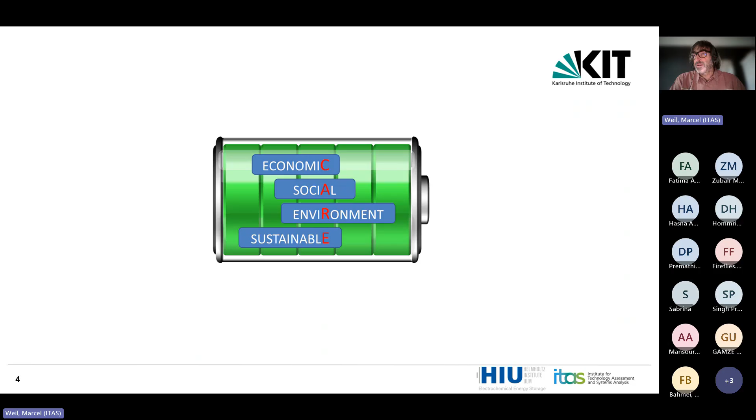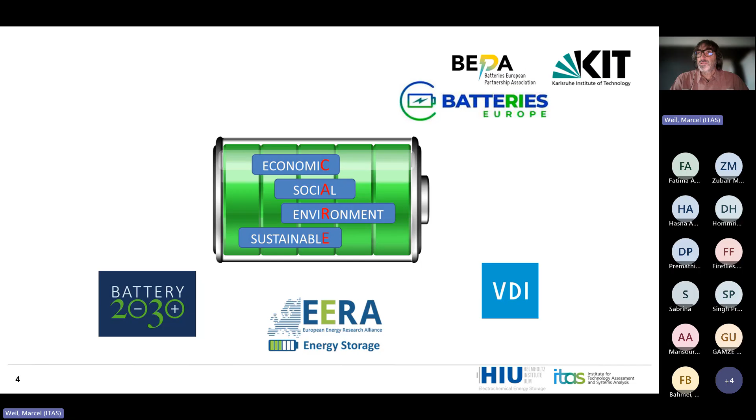We are quite active in international flagships or activities, for instance Battery 2030 Plus in Europe, then the different EERA, the European Energy Research Alliance - we are active in the energy storage system group, heading the subgroup of techno-economics and sustainability. Also for VDI in Germany, Batteries Europe with BEPA, where I'm personally heading the Task Force Sustainability. We're also involved in the carbon footprint regulation of the EU, and now, rather recently, we've been invited to support the strategic European energy technology plan, the SET plan, where we are responsible for the topic of energy storage.

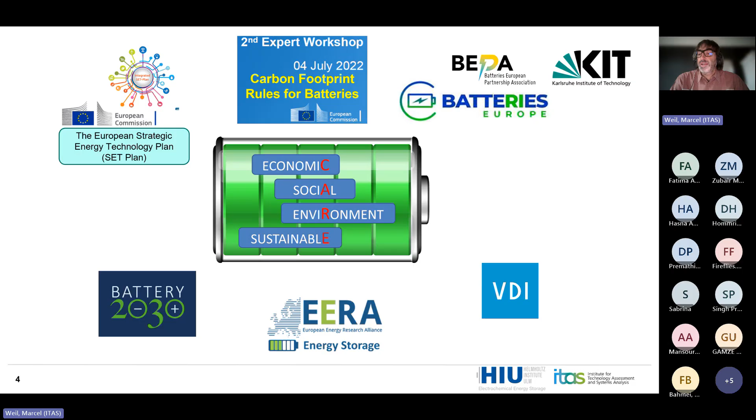Now coming closer to the topic - we are hopefully in the middle of the energy and mobility transition. If we want to solve our big global problems, and that's not only global warming, we have to stop the use of fossil fuels in all sectors. That's not only driving cars, it's also on the industry level, the commercial customer level, the household level, and of course mobility is a big fraction.

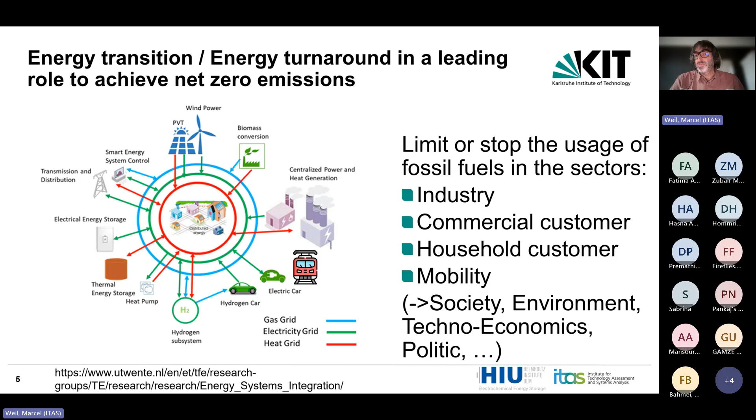Here, on one side, we have to deal with the whole society and really bring these developments forward, addressing not only technology development but also the complete society, looking for the interaction with society, to really solve the environmental problems and find a techno-economic pathway which is possible in the end. Hopefully this is all supported by politicians with a clear vision and clear understanding of what we have to do at present to solve the big challenging problems - at least on EU level.

There is now a certain awareness, and it's even such that they're saying, look, batteries are really a key item for all the developments in the future. Maybe that's also the reason that the battery sector is one of the first sectors to have a battery passport. You have special European regulation for batteries here. They are absolutely at the forefront. For other technologies, such things do not exist. So at least on the EU side, they're really aware that battery technology is an important topic and we have to focus on that. For that, we need some regulations and framing conditions, otherwise this development maybe doesn't go in the right and hopefully more sustainable direction.

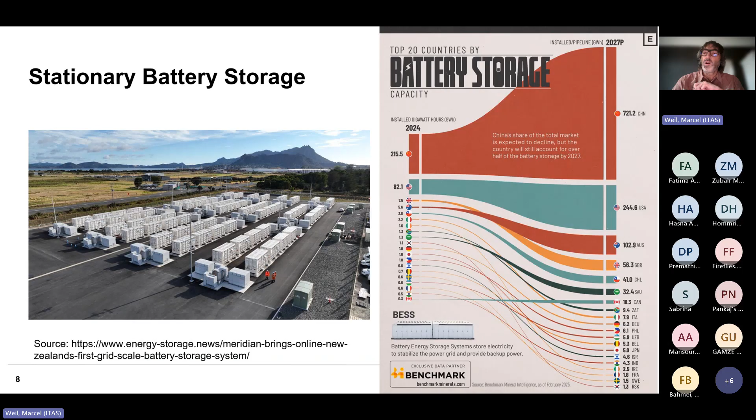We have a little bit of a different perspective. We say, of course, mobility will be a major driver for battery demand, but there will also be a tremendous demand for batteries in the field of stationary energy storage. That's not a development restricted to Europe. You see it clearly in this graph, also in the numbers for Asia, especially China, and the US. There is already big demand nowadays, and the perspective is there will be an even stronger increase in demand for stationary storage. That is actually what we believe, and there will hopefully be a publication from our side on that quite soon. So, mobility is important, but our message is: don't forget the stationary part, because that will also play an important role in the future.

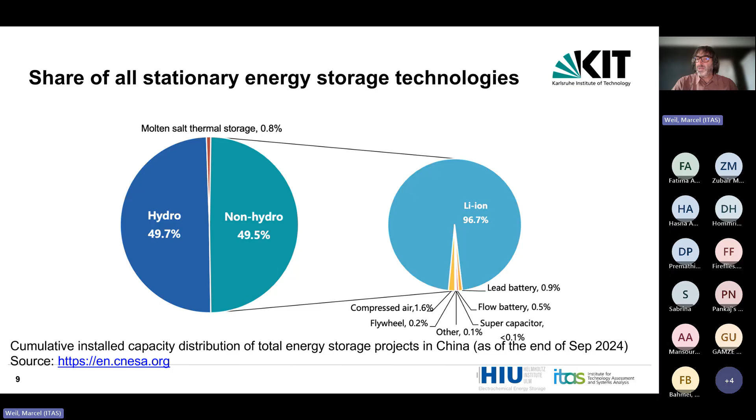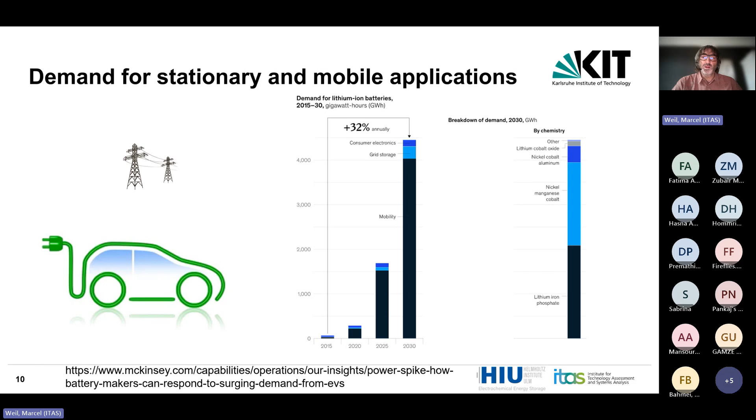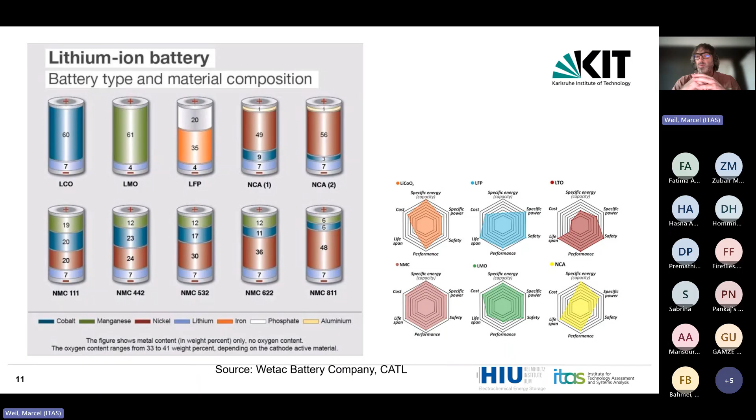And then if you also follow all the news in online media or newspapers, you always recognize there are a lot of announcements, and unfortunately quite often the announcements come from Asia, especially China, with all the dominant companies like CATL or BYD and all the others. They always push the market forward, saying, look, here we have the highest energy density, the highest lifetime, now super fast charging, and so on. This big news is nearly always coming from Asia, not from Europe and not from the

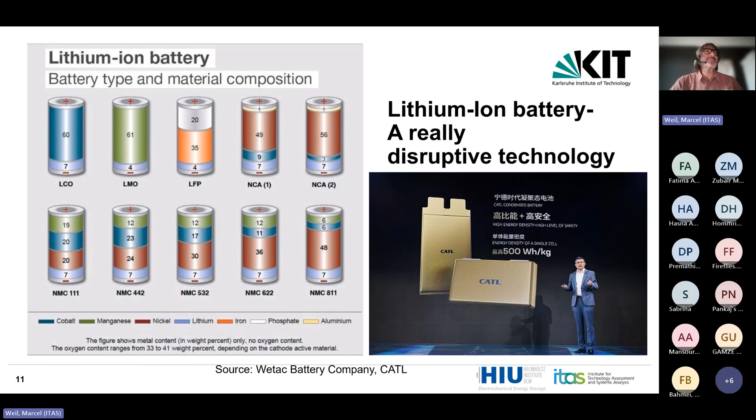States. Nevertheless, we are convinced that the lithium-ion battery technology is really a disruptive technology. That's why it's so important, and why there was even a Nobel Prize for the lithium-ion battery in the past, because otherwise your smartphone would look like that, or your electric car would look like that, but potentially with a trailer in the back with a lead acid battery, or your laptop maybe with a bigger screen, but with the battery on the side.

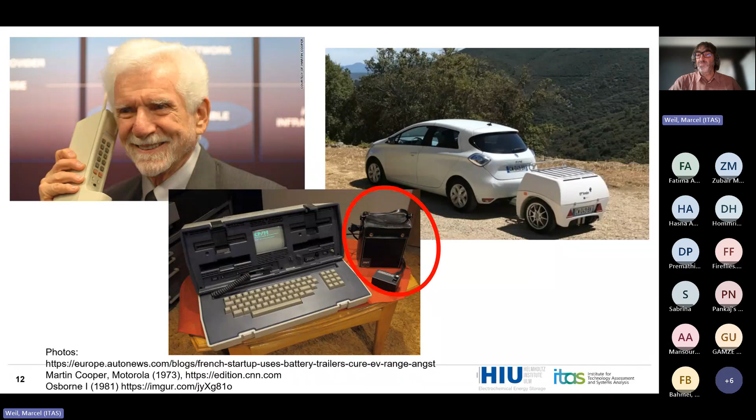Therefore, the lithium-ion battery was a game changer for all the developments we see today; that's really a disruptive technology. A lot of people always promise there is maybe a disruptive technology. Well, lithium-ion is really a disruptive technology and pushes all the developments in different sectors forward. And if you look around at what you are using, your smartphones, your sensors in your house, there are a lot of lithium-ion batteries already in place, rechargeable, sometimes also not rechargeable, but nevertheless lithium-ion batteries with high performance. So it looks like there is a bright future of batteries globally and also in Europe.

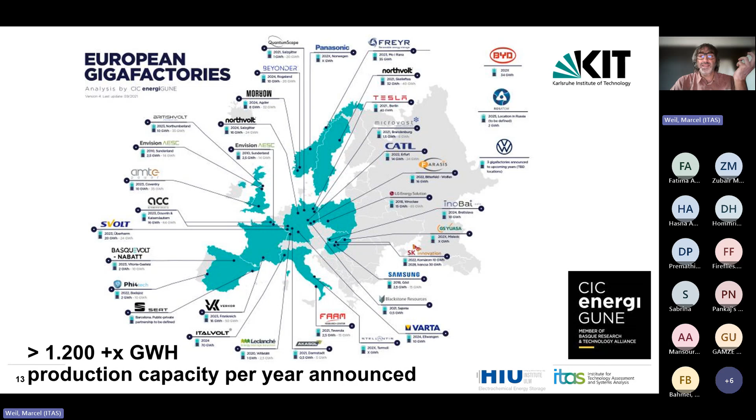And then there come people like us. I'm sorry about that. And we are saying, potentially lithium-ion batteries are not so sustainable, or at least we have a question mark regarding sustainability. And why? Well, as you know, they rely on so-called critical raw materials, regarding the EU definition, critical and vulnerable. That means depending to a high percentage on imports in Europe. That is also true for the States to a certain extent, but especially for the EU we quite often depend to a high percentage on imports, especially from not politically stable countries or countries with strong influence from Asia.

And the metals which are considered, as you know, are cobalt, lithium, nickel, copper. Copper's role is sometimes underestimated, but also phosphorus as a critical raw material, and natural graphite and also synthetic graphite now belong to the so-called critical raw materials. So we have to change something here, because otherwise the countries which export such critical raw materials can steer or even stop any development in other countries just by blocking the export of such materials. That is a big danger, and the EU and all the other countries try to solve this issue by looking for more regionally available resources or to replace resources.

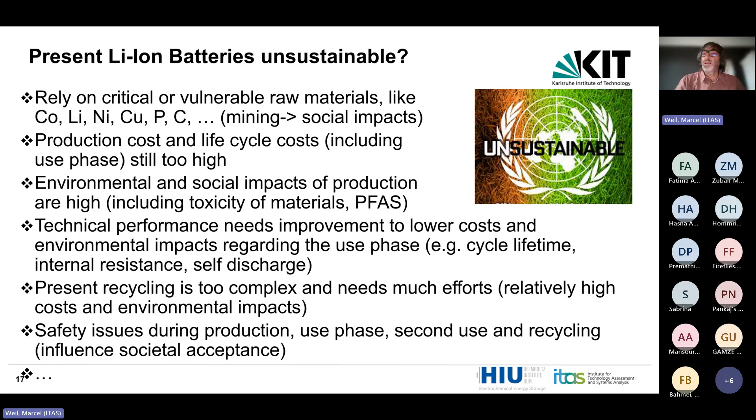And then last but not least, there are also safety issues. Maybe in the news you sometimes find information that some batteries are burning in bicycles, laptops, electric vehicles, cars, and so on. The safety issues are not only during the use phase, but are also quite important in the second use and recycling, because a recycler has to deal with the batteries, and if they start with a so-called thermal runaway, then sometimes in such recycling companies there's a big fire caused by the lithium-ion batteries. So not so sustainable, and that is actually the reason, in the end, that we are focusing on post-lithium batteries.

And then you look at the full periodic table to see which systems are promising, and that's of course sodium. That is at the moment a really interesting system, which is really close to industrial production or is even already in industrial production. Then potassium, magnesium, calcium, aluminium, zinc, chloride, and even more. That is under investigation at KIT, within POLiS, within Helmholtz Institute Ulm, but of course globally. There are big players and even industry companies with big research groups. So that's a big development towards these so-called post-lithium batteries, which have at least one major advantage: we use abundant materials in contrast to so-called critical raw materials like lithium, cobalt, nickel, copper, and so on.

Here, it was my try, I would say. So please don't take this graph so seriously. But the question is always to have an idea about the so-called technology readiness level of the different systems. And sometimes it's really difficult to estimate, because there's always a big discrepancy with what you hear in the news, where you always have the feeling everything is solved. But if we talk with technology developers, they only talk about problems. So we always have these two elements, and that's a bit crazy. On one side, the news says we now have a new system running very well with high performance and everything is solved. And on the other, the real people working at the base say, okay, maybe they have a running system, but maybe they still have the problem of this and that.

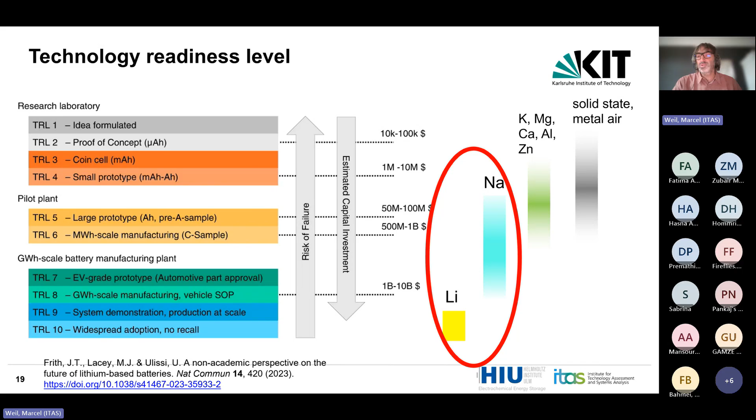You never know. If you maybe solve one big hurdle, especially for metal air batteries, all the problems with some side effects, then of course you have maybe very fast industrial applications. So that was just my try to have a certain estimation of the different TRL levels. But we will focus in this presentation mainly on lithium and sodium batteries, and magnesium actually too.

Okay, now we're coming to the topic sustainability. And if we think about sustainability, then we're not only looking at the production, we're really looking at the different raw materials, the design phase, quite important, the production itself, of course, the use phase, because there will also in the future not be the one battery which solves everything. Maybe there will be a dominant one, but there will still be other batteries which really fit a nice niche application. So also the use phase, and we have to assess the different battery types always in respect to their very specific application case.

Then the potential second use, third use of the batteries is a huge topic. If it's really possible, we will see in the future. And then, last but not least, recycling, or hopefully recycling. But as I said, recycling is not solved so far. And then, again, sustainability, with what different perspectives or methodologies I can address the topic, which on one side traditionally has just the three dimensions of economy, ecology, and social or societal aspects.

And if we address that, at least in the upper part from a rather quantitative assessment, then we have the traditional MFA, the material flow analysis, or also dynamic material flow analysis, especially important if you try to understand if there are some critical raw materials, or what could be the full loop of such materials in the global material flow system. Then the full family of life cycle sustainability assessment with the different LCA methodologies: the environmental life cycle assessment, the life cycle costing, and the social life cycle assessment.

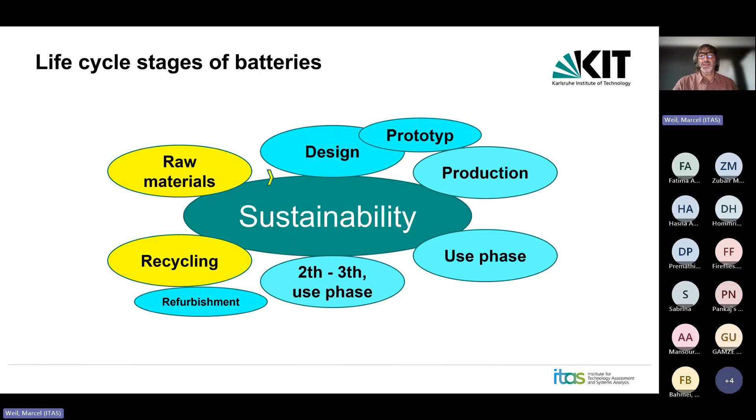Okay, let's start, now focusing on sustainability, raw materials, and the topic of recycling. And here that's actually quite an old graph, from when we started with this topic 15, 20 years ago. And always the question was, okay, there are a bunch of different metals which I have to use for the production of batteries for different applications, for different scenarios. And then the question is always, do we have enough resources, local or global, or do we maybe have some conflicts, or should we support the establishment of more mines and so on.

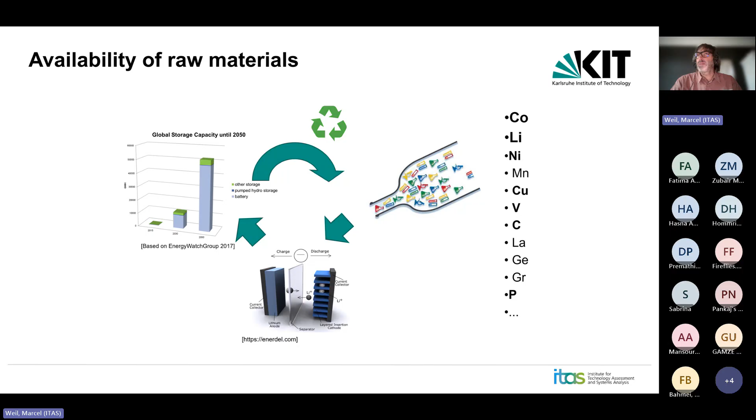And then of course also how we get all these materials back through the recycling loop to usage, hopefully in closed loop recycling to bring them back to the battery sector, or sometimes of course also in open loop, so that some materials can be used in other sectors, for instance for glass production or whatever.

We did a lot of different investigations in the past, but let's focus on one here. It's rather old, from 2018, and we focused on the mobility sector, especially the effects of electric vehicles. We have a lot of changes at present time, but we'll focus on that period.

Here's a graph, even from 2012, just so you understand what is behind the MFA model, the material flow analysis model. It's already 13, 14 years old.

The idea behind it is clear: we look on one side, the left side, at where the resources are, the different resources. We have salt deposits, the brines, especially in South America. Then we have spodumene, for instance in Norway, Asia, or Australia. Then we have lepidolite or petalite, or even some glimmer with lithium, but they weren't so important in the past, and also not nowadays.

Then, of course, there's the production and the usage. In the past there was big production for the usage of lithium in glass and ceramics, and batteries was just coming up. This changed dramatically. Now batteries is the biggest sector by far, dominating by 80%, and all the others like lubricants or alloys are no longer so important as the application of lithium.

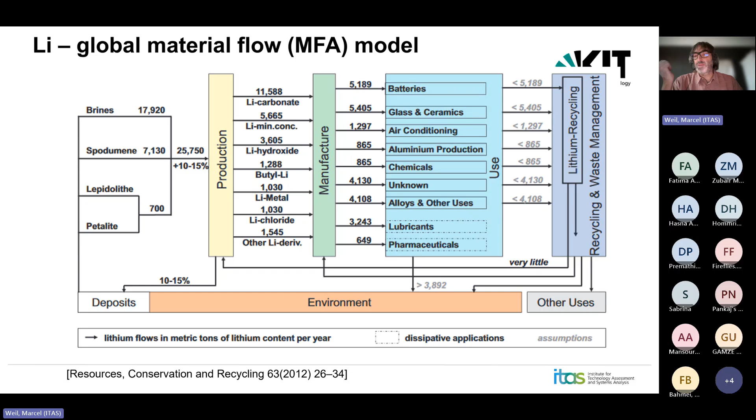And then also, what happens after the usage of the metals or materials, and what end of life looks like. Maybe it's recycling. Do we have dissipative losses, where they just end up in the environment with no way to bring them back? Or is there maybe even the potential for really a closed loop recycling, or at least an open loop recycling?

Based on such basic understanding of an MFA, we developed a dynamic MFA model, shown here on the right side. We focus not only on lithium, but also all the other materials: cobalt, nickel, manganese, aluminum, copper, iron, phosphate, and even graphite. Then you see the different parameters which change over time, like the global population, how many cars we have per capita, the vehicle lifetime, the battery lifetime, the market share of different vehicle types, and the different metal content in the different battery types.

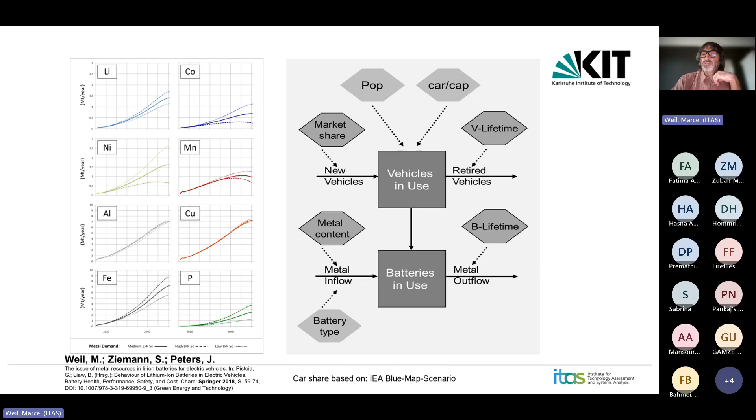That was the beginning, a quite dynamic model, but also a rather simple one. At this time it was really difficult to estimate how the parameters change over time with the population, but especially with the batteries—how big are the batteries in the electric vehicle? Here we have full electric vehicles, plug-in hybrids, and fuel cell electric vehicles, so we even included fuel cell electric vehicles. We estimated the battery size, and nowadays you would laugh about that, because even a middle class car already has much bigger batteries. That was a rather conservative assumption at the time, but the development turned out totally different.

We'll see it later. Here's how it develops over time, with vehicle life and battery lifetime and so on. Regarding these scenarios, we called it low LFP, meaning a low lithium iron phosphate battery ratio—that means all the other battery technologies dominate. Then medium and high LFP mean it's dominated 75% by LFP, and the others cope with the rest.

This is maybe the funny part: at this time I even received calls from colleagues doing real battery research. They called me and said, okay, now we know you may be an expert for sustainability, but for batteries you have no idea, because LFP will never enter the car sector. That was 2018, and those were the battery experts. Now it's totally changed—now the market leaders like BYD, CATL, Tesla all use LFP. They had, of course, some developments, not only on cell level but also on pack level. Nonetheless, you see how fast this changed within a short time of 7 years.

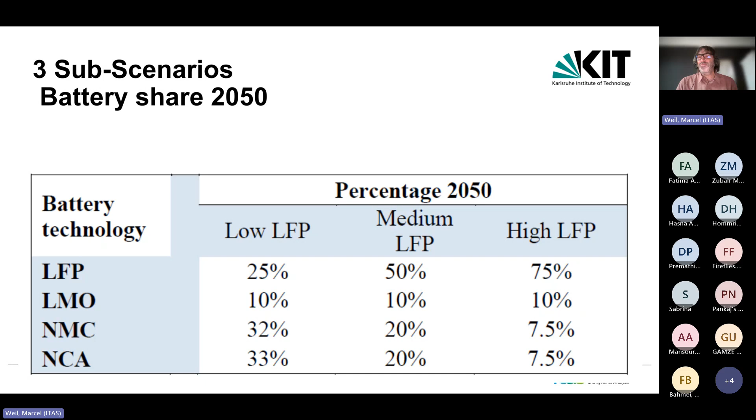Even such scenarios, which were just a scenario then, experts at this time said, oh no, that will never happen. And nowadays it's the state of the art. Just a fun fact on the side.

So coming to cobalt, as you know from all the news, we have the big problem that cobalt is especially situated in Congo. Congo is a very politically unstable country, highly influenced by all nations which try to have access to the resources of Congo.

Then, of course, there are also some other players, Zambia, which they try to push forward at the moment, but also Australia as a big country with a lot of outback where you can start mines everywhere, and they have a lot of resources.

But nevertheless, it's critical because Congo is in the center, and therefore we highly depend on Congo and maybe the countries which influence Congo. Therefore, cobalt is quite critical.

So let's see how this affects the scenario. On the right side here, you see the reserves and the resources. The reserve part of the resources is the part which you can mine in an economic manner nowadays. But this also changes over time.

Sometimes even the value for resources changes over time, because if you look for new mines, maybe you are very successful and find new deposits. So reserves and resources are estimations about present knowledge of how much is available globally, but in the future this may change, sometimes even negatively because you overstressed it already, though quite often it's rather positive, finding new deposits and increasing the values.

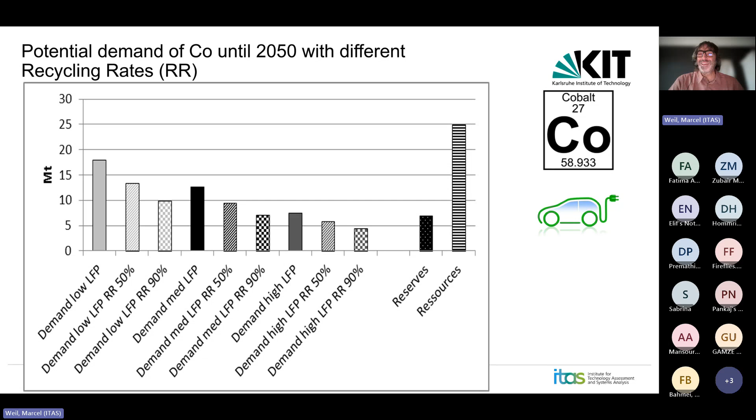Even in Germany now, they try to mine some lithium, on one side from minerals close to Freiberg. But even here in my region, the Rhine Valley, they already use geothermal plants to get the lithium out of the deep groundwater, I would say. And that is supported by the EU.

So we of course also potentially have some own lithium sources. One activity is really in Europe - in Portugal, and also some East European countries. There are some ongoing activities.

But of course the big players at the moment are Australia, interestingly, but also South America, one of the biggest producers, and China, of course.

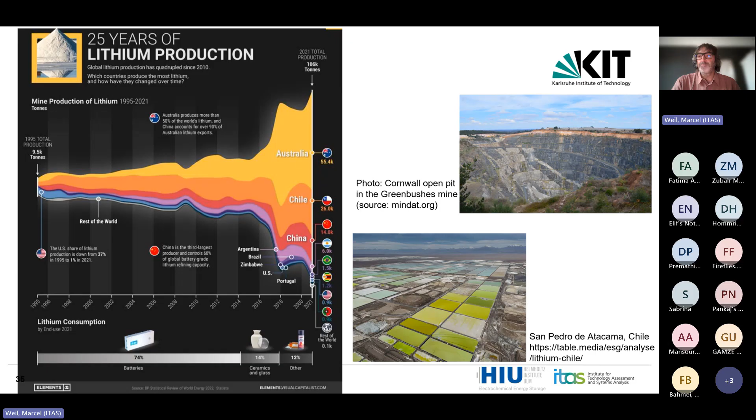If you go not from the environmental perspective or social perspective, then of course there are tremendous impacts. You also have to deal with that and find maybe a solution for that. So there are always different things and goal conflicts which you have to combine in such a way that it's at least not super critical.

With all the calculations, which are shown only for cobalt and lithium, not for the other metals, just due to time restrictions, we could say all the sensitive parameters could change in the future. Maybe the battery lifetime increases, and therefore in all the different cases resource demand would decrease. And if the share of SUVs would also decrease, then you use less battery for smaller cars, and you would decrease the resource demand in the scenarios.

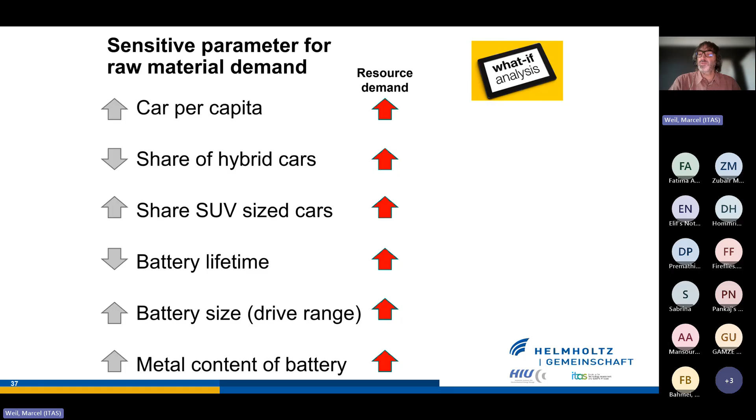But we also have to say the opposite is true. If we increase the usage of SUV-sized cars, then there would be an even more tremendous resource demand in the future, even more increase than we estimated. And the problem is, in fact, that we should all use such small cars. The bottom line in the green circle, we should use such cars. What happens is that we use middle class, which would maybe still be okay, but then we use trucks, SUVs, and even beyond that, sports cars and so on. And they have a high demand on one side for big batteries and sometimes even for high performance batteries.

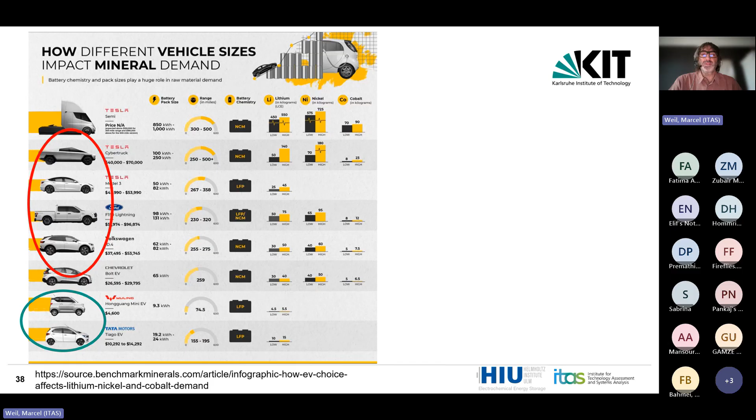And if you look especially at high performance batteries, then you have to go for nickel cobalt systems for high performance, and LFP is rather suitable for others. So crazy enough, and you see here in the numbers a strong increase already in the past, but the most recent numbers, 2024, show we already have 54% of new cars being SUVs.

And that is, of course, a totally unsustainable pathway, which is customer driven, society driven. So crazy. If we talk about needing more sustainable batteries, it's nice, but in the end the customers, the market, decide that we go on a totally unsustainable pathway. For this we need a solution and maybe a different trend, because that is not the right way we're going at the moment.

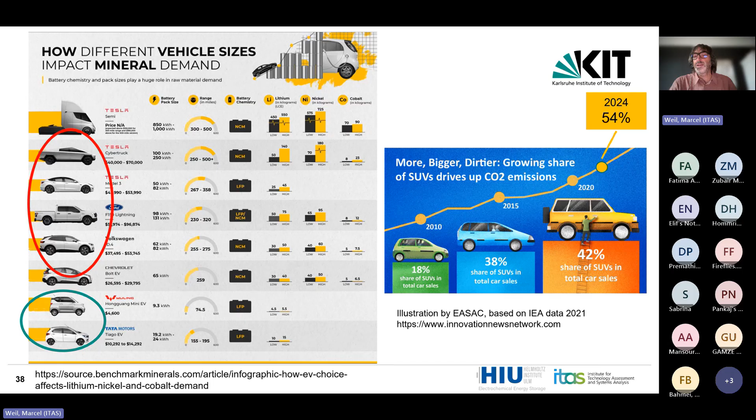Now, coming closer to the real battery topic, for us it's quite important that we influence the design of a new battery, because the design in the end determines everything. It determines how easy the production is going, or how well they perform in the use phase. It determines if they are capable of going into a second or third use phase. And in the end it also determines recycling. The EU is already talking about design for recycling, because if you develop a new technology today, you can't wait 10 or 15 years until there's a big waste problem.

People say maybe the battery or any technology is difficult to recycle, and then we have to deal with that. So not this end-of-pipe thinking, but really influence the technology already nowadays, so that there are easy ways to improve recyclability, which in the end pays off in 15 years when the battery is ready for recycling after the use phase. So design is quite important for us.

Therefore, we have strong cooperations with companies, with the technical developers, to influence hopefully the design in the right way, and also then to deal with prototypes.

And we did it, in a long tradition. We published the first LCAs of sodium-ion batteries. Then we have the first cost assessment of sodium batteries, which is very highly cited, one of the most cited publications in my case. Then we also had the first LCA on saltwater batteries—we will focus on that later. The first LCA of magnesium batteries, and even a prospective LCA for sodium batteries. And now with colleagues in Japan, it's already published, the first LCA of potassium—in this case, not calcium, potassium battery.

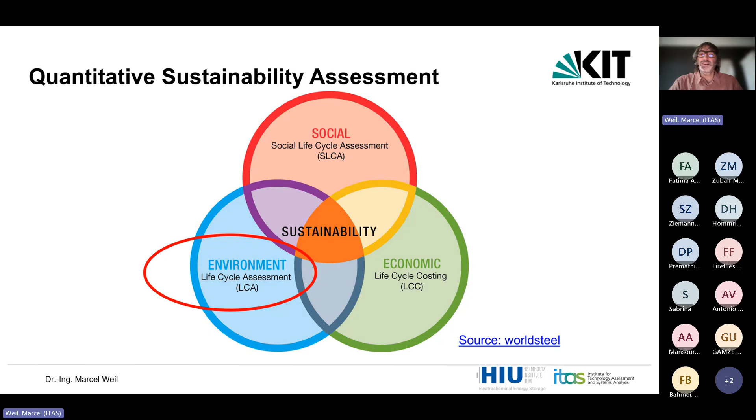If we talk about sustainability, we normally try to focus on the different dimensions, though sometimes it's not possible—sometimes in early TRLs, you just use a certain indicator set, because a full LCA would be too much, not possible in this early phase, and makes no sense in the end. So we try always to address the different dimensions, or even combine them, but we have a strong focus classically on life cycle assessment, focusing on environmental aspects.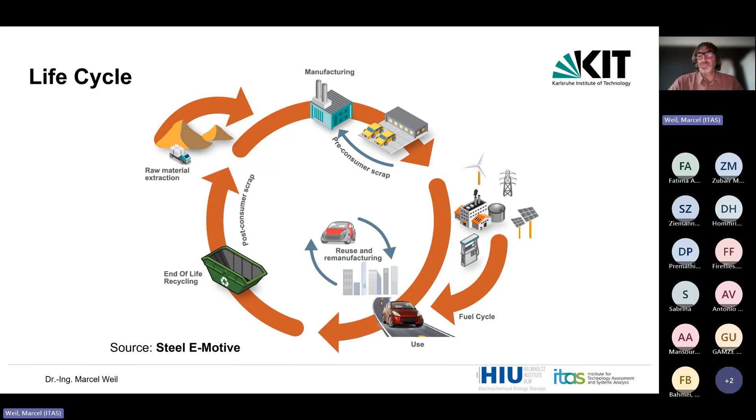If we talk about LCA, then traditionally the full life cycle—think about an electric car—you need raw materials, you have to produce the car, then hopefully you use it in an efficient and sustainable way. Then hopefully a second use of the battery, or reuse, remanufacturing, or last but not least recycling, bringing it back to the value streams.

And if we talk about LCA, life cycle assessment, it's not a new methodology. The ISO standard 14040 is from 2006, and the ISO standard 14044 was maybe two years later. So it's an established methodology, and I will not go into too much detail on LCA, because that would be too much for this seminar. But if you're interested in this topic, you can contact us later.

Just to have a rough understanding, there are maybe four important traditional steps in LCA: goal and scope definition, also functional unit. Inventory is then all the inputs and outputs of your considered technology within the system boundaries. And then on top, if you have all material flows—emissions, energy use, waste, and products—then you do an impact assessment.

You estimate: okay, if I have all these material flows of this product, of this system, of this technology, in a big electric or energy system, then you can assess different levels of granularity. Then on top of that, you try to understand the potential environmental effects, like global warming, acidification, resource use, and such things.

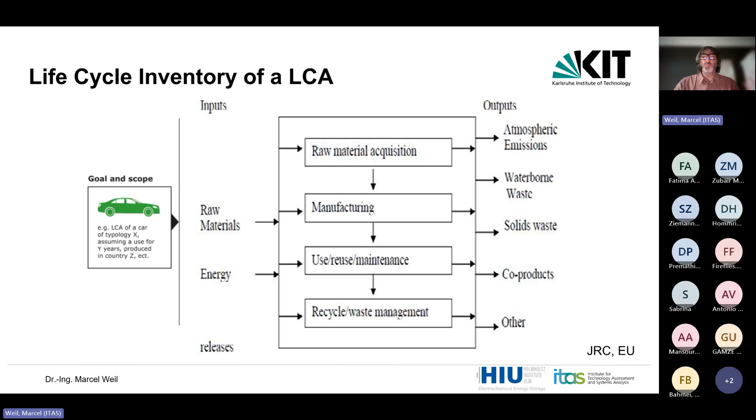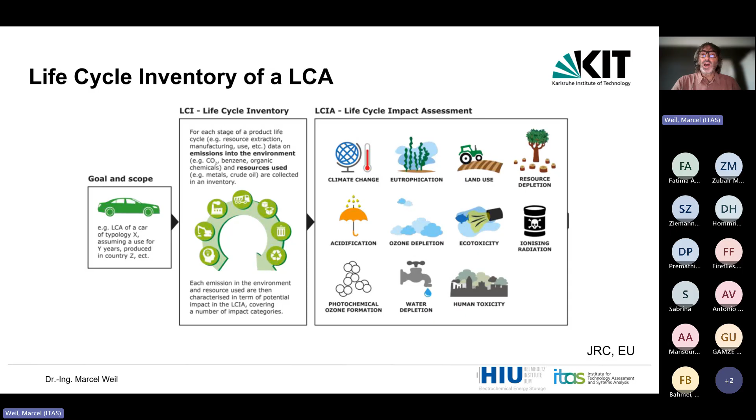And if I have all these material flows, then I ask, okay, what are maybe the climate change issues, the eutrophication, land use, toxicity, and so on. That is always the process. First it's based on material flows caused by the technology itself or the system, and then on top of that, you try to understand what is the effect of that, or maybe compare different technologies. And that is called the impact assessment method, the third part here in this graph.

So you always have to prevent the really bad ones and maybe exchange them. And that actually also happens - these substances were used in the past for cooling systems, and they're being replaced in many technologies nowadays. They're also looking for alternatives in other technologies, maybe for car air conditioning, to avoid using such critical gases.

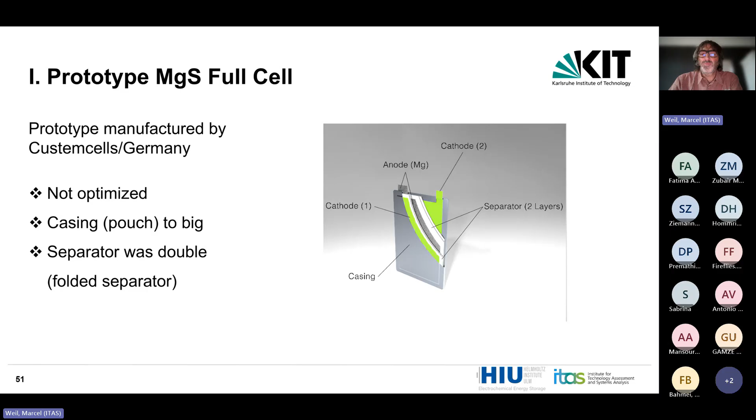So in this case, this cell was not optimized. Of course, the casing was too big for the prototype. The separator was double folded - it was a little bit crazy. Too much electrolyte and so on.

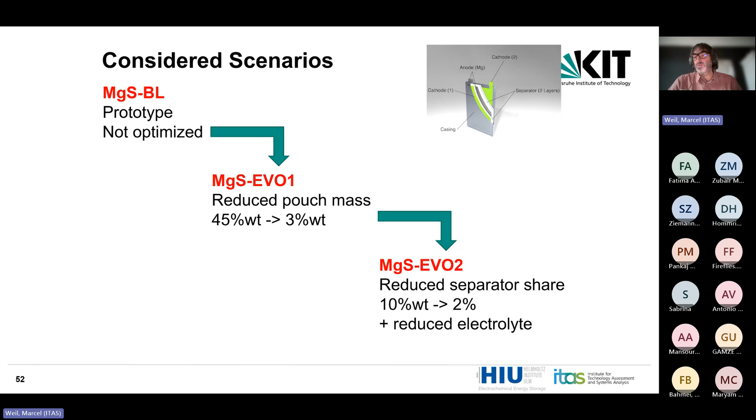We discussed with the technology developers - okay, of course there are some restrictions to produce such a prototype, but how could we theoretically improve it, at least find the low-hanging fruits to improve the cell. So, reduce the pouch mass, because the pouch was not optimized at all - there was too much pouch, so we reduced it from 45% weight to 3%, which is the average of a normal modern lithium-ion battery cell. Then in the second step, we also reduced the separator share and the electrolyte to a normal level, which is necessary for the cell to run just on the theoretical level.

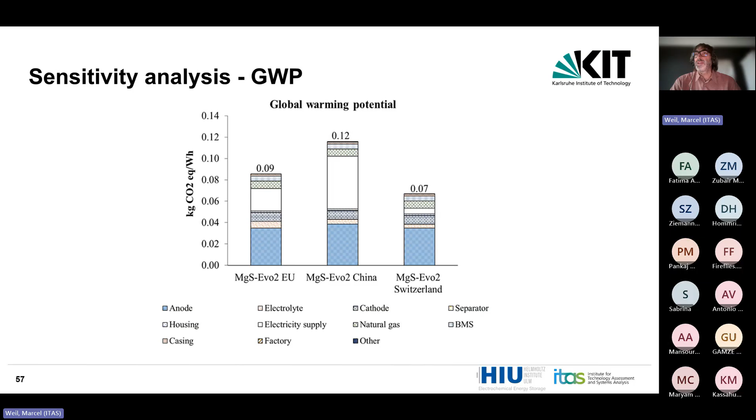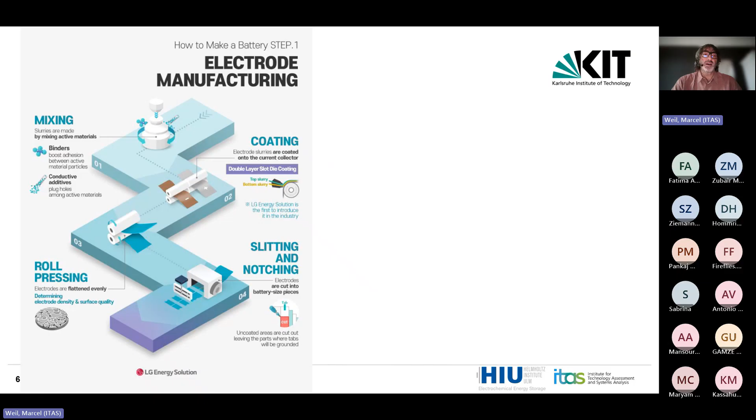Coming to the production, and maybe if you are in the topic of batteries, you are much more familiar with the production of cells than I. But we did also some work in the past, and you see here the traditional way to produce cells, with the slurry mixing, the coating, the roll-to-roll pressing, the slitting and notching, winding, tab welding, and then of course do you produce a round cell, a cylindrical cell, or do you produce a pouch cell? Of course, a big difference. Then the electrolyte injection, and in the end also the formation of the cell. So at least roughly that is it.

So we investigate, as I said, all the different steps, and that means we really enter the laboratories and measure for all the different steps the material consumptions, for instance, special gases, then the energy consumption for heat or other stuff, and also maybe estimate if there are potential emissions, maybe even measure emissions. So really, it was a lot of work to get primary data for all the different steps.

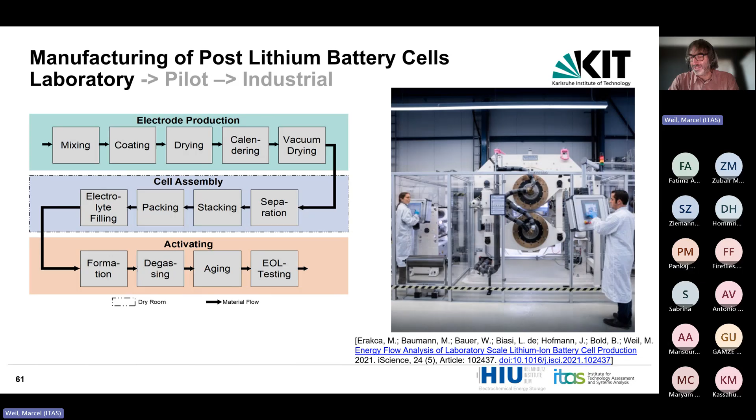And I have to say, primary data is always the only way to, in the end, produce reliable and robust LCAs or cost estimations. So therefore that is so important for us. Not easy, and sometimes we are not always welcome if we ask for primary data, but that is the way to go to have in the end robust and reliable results.

Okay, and then of course, sometimes they produce only 8 cells. Of course, the efficiency is really bad. But if you would then produce regarding the capacity, if you go really to the capacity of the line with 400 cells, then you reduce significantly the amount of impacts per cell or per kilowatt hour. And that is then especially important to understand.

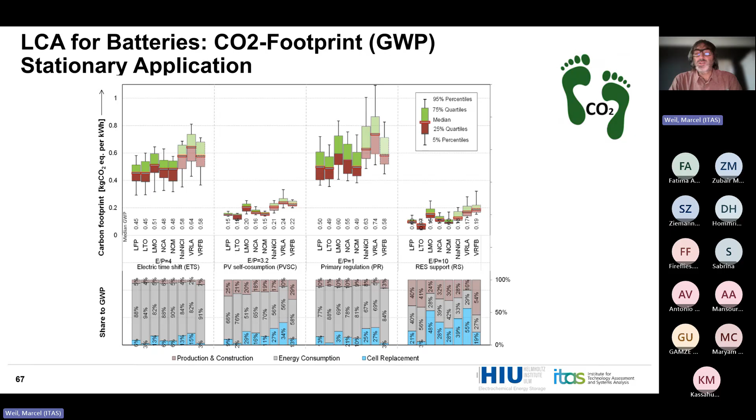And we did that not only for CO2 but also for cost assessment, and it's a very similar picture. Again, a lot of uncertainties, and there's not a clear message for one or the other technology. But again, LFP performs not too bad, and the others depend on the requirements in the considered application case. So we always have to do this kind of investigation specific to the application case, because the requirements are always different. That is the important message here.

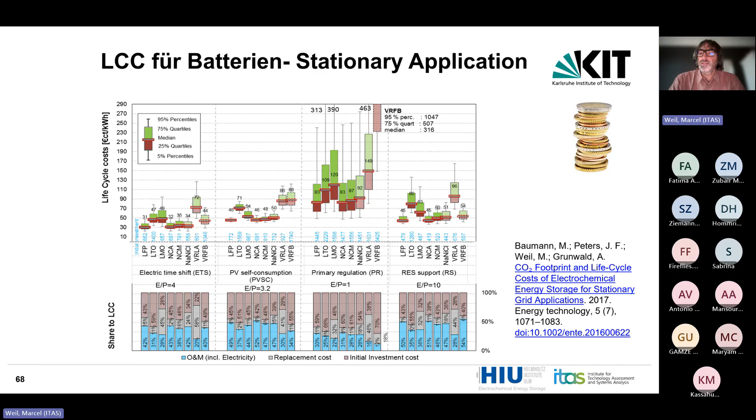Okay, I will not focus on the second use or third use phase. But if you're interested, there is also a publication with a former colleague from China, so maybe have a look here.

Now we're coming to my big topic of recycling, refurbishment and such things, which is quite important. As I said, recycling is really connected to design, and therefore we always try to influence design to improve recyclability in the future. That is the big thing, because topics like PFAS are a problem along the full lifetime, but especially in recycling. If you have PFAS, it is an issue.

If we could easily exchange PFAS with another binder in the system, that would already be a big advantage. If not, or the new binder does not have good performance, then we really have to understand what that means over the lifetime. So we're not saying this is clearly understood. We still have to understand what it means in the use phase if we use a new binder, for instance replacing toxic elements which are critical for recycling.

Because sometimes there may be binders which are not good for the use phase. And then, of course, the question is whether the performance is so bad that it makes no sense to replace, at least not with this binder in this system.

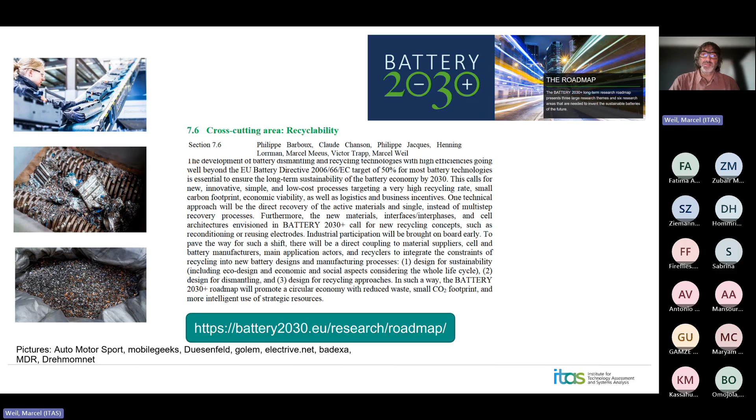Good. Recyclability. This slide is a big topic in all the big EU flagships, here for instance Battery 2030+, with the roadmap, and there's again an update of the roadmap, so quite soon there may be a new version available. And here I'm again, with Marcel Meeus and others, in charge of the topic of sustainability and recycling.

For battery recycling, we also did some work in the past and had some interaction with rather smaller recycling companies in Europe, so that we really understand what the state of the art of recycling is.

Why is this important? And here maybe case one, and here we compared...

The so-called aqueous hybrid ion battery, that was the Aquion battery, the so-called saltwater battery, was the first one, which was actually quite pushed in the US. Very interesting, MIT prize and also investment from Bill Gates and so on, received a lot of money from government and industry and maybe from risk money. And then after a few years, it just burned, because it was bankrupt, and then the whole company was sold, and the patents also sold to China.

Interestingly for us, I found this technology again back in Europe. If I go to a fair, there's a new company, and they produce the components. As I know it correctly, they produce the components in Asia, then assemble in Austria, and therefore it's then a European technology. They go to fairs where people who have their own house or whatever, and then they sell it as a green battery, still with good recyclability and so on. We will see it later.

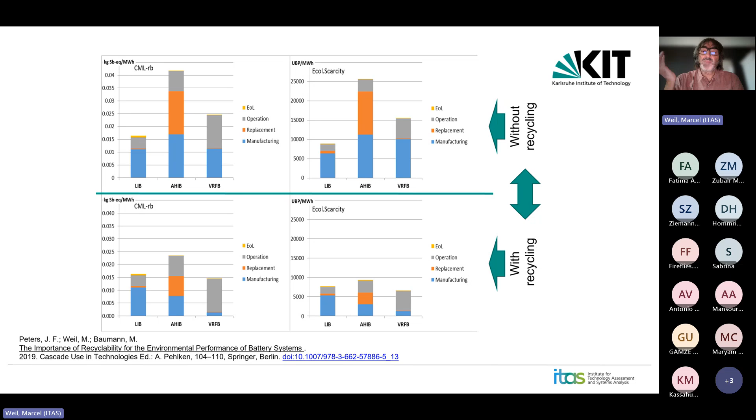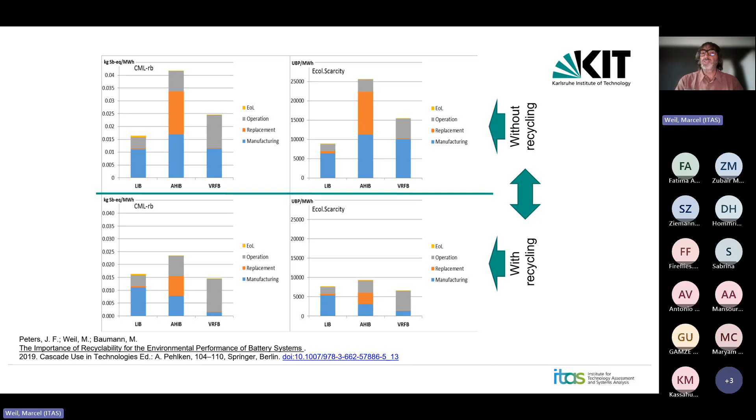So, therefore the message here: okay, recycling is important, because if you don't consider recycling, and maybe then your recycling is not efficient, other technologies could perform better in a certain application case just because they have a better, easier way to recycle the materials. So you cannot rely on your performance in the use phase always being overarching. You also have to ensure that end of life recycling can take place efficiently, especially in comparison with other options of this technology.

Then coming to a second example, and I think it's even the last example, the sodium battery and recycling. You see sodium batteries just as a starter. Why is sodium battery so important as a topic?

You see there are already estimates how the battery market for sodium will develop in the future, and this is only one of the estimates. There are even also other estimates from McKinsey or whatever, from other consulting companies. So they are thinking that there will be a tremendous demand and application of sodium batteries, especially in stationary applications, but also step by step also in automotive ones.

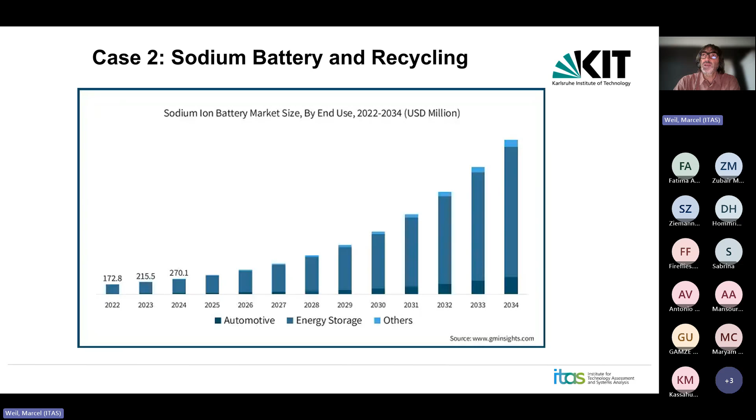So that is really interesting. It would be a really good development, because with the replacement of lithium technology, at least in some applications, you can reduce the pressure on the resources. And why are sodium batteries so promising? They are basing, of course, on abundant sodium and hard carbon.

Hard carbon you can even produce from biogenic waste. You use aluminium foil as current collector instead of copper in lithium-ion batteries, which is a big advantage because copper has a tremendous environmental impact. Also, aluminium is also not totally environmental friendly, but it's better than copper, and it's also not so critical as copper. Then the energy density is at least okay.

LFP is still higher, and sometimes they have promised fast charging capability and also good cycle life. And there are even, if you follow the news, always new developments which they announce now, increasing lifetime and so on. And the big advantage also, it's a drop-in technology.

That means even if you have established a lithium production line, with some smaller changes in the production line, you can easily also produce a sodium battery, whatever that means. Yeah, if you talk with practitioners who are responsible for a production line, they always say, well, we have nevertheless to change a lot. Yeah, but at least there is a way to change from lithium to sodium. Instead, if you go for totally different technologies, you have to change maybe the production line completely. That is then something which would not happen so easily.

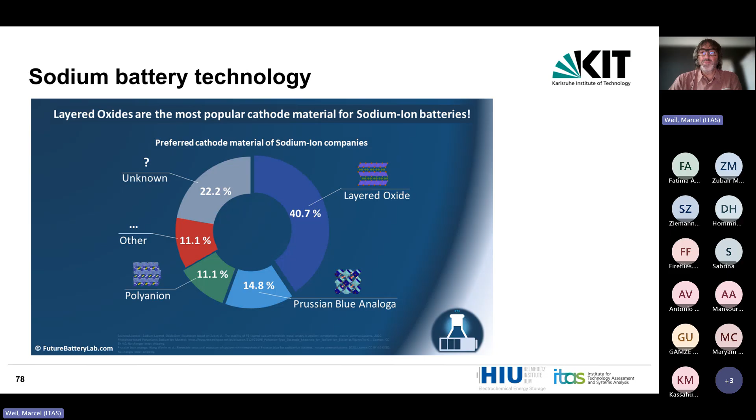Here you see just the market share, and you see here dominant layered oxide technology, followed by Prussian blue and polyanionic. That is the market at the moment, and we will see how this may change in the future.

And there are a lot of activities ongoing in US and Europe. There's a lot of interest - of course, not any longer Northvolt, but maybe then the following activity. So, big interest. But the big players, at the forefront, they are in Asia and especially in China with BYD, CATL, and Hina Batteries, we will see in the next slide, and so on. So the big player, SVolt even, and in Japan, rather minor activity, and also minor activity in India.

And why is this so interesting? You see here there are already some testing. They already test some stationary batteries here from Faradion, a corporation here in Australia with Nation Energie, or here in Biwatt from China. They already establish big batteries, and you can already buy, I'm not sure on Amazon, but maybe other platforms, sodium-ion batteries for small household charge and discharge.

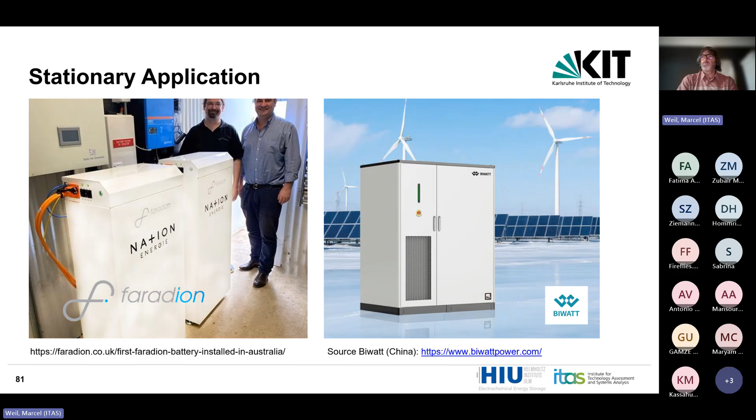So really interesting development. And then something which was not so expected was the usage of sodium batteries in cars - that's JAC Motors and Hina Batteries. They have a cooperation, and they already use sodium batteries and test them at the car level. That, of course, is something which doesn't take place in Europe or US - it takes place in China, and they learn a lot, and we still have to learn a lot. So therefore they are at the forefront, and we have to keep going so that we maybe reach the same level quite soon, because it's a really interesting technology.

So we will see. And now CATL, as one of the big players, has even announced this Naxtra battery with a lot of performance indicators which are really promising. So it looks like, well, if they go this pathway, they could at least partially replace in some applications lithium technology by sodium batteries.

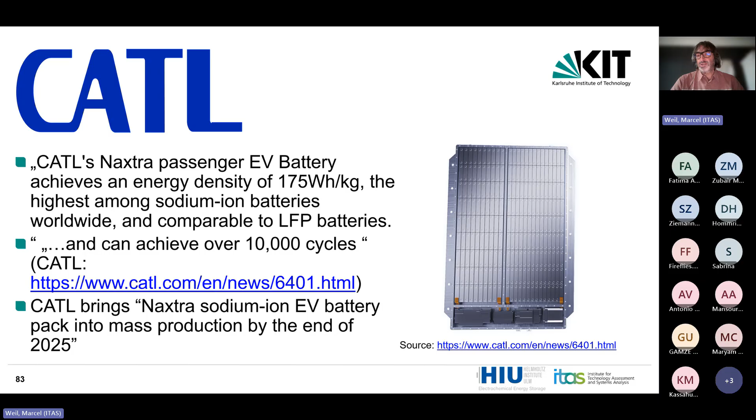So the big points: they achieve high safety standards with the batteries. They have entered the automotive sector, which is of course much more complicated than stationary applications, and managed to meet the high technical requirements there. That's amazing. They have close performance to LFP, and low temperature operation until minus 40 degrees, which is much better than other battery systems. And mass production already takes place now, again in China.

Good. And here was a nice cooperation with Volkswagen. They also look, of course, on future battery systems, and I supervise here together with Helmut Ehrenberg and Werner Bauer.

PhD student Jonas Sprengelmeier compared here, for instance, different lithium batteries with sodium batteries, and then even different production locations in Asia, Europe, and US. You see, at least independently from the technology, it makes sense at present to produce in Europe - but I always say 'but', because the electricity mix and developments change totally in Asia, especially in China. They will quite soon be improving their performance and then have a greener energy mix than Europe.

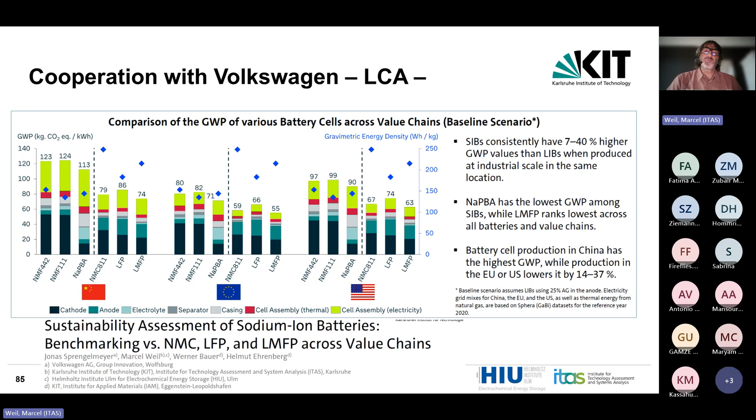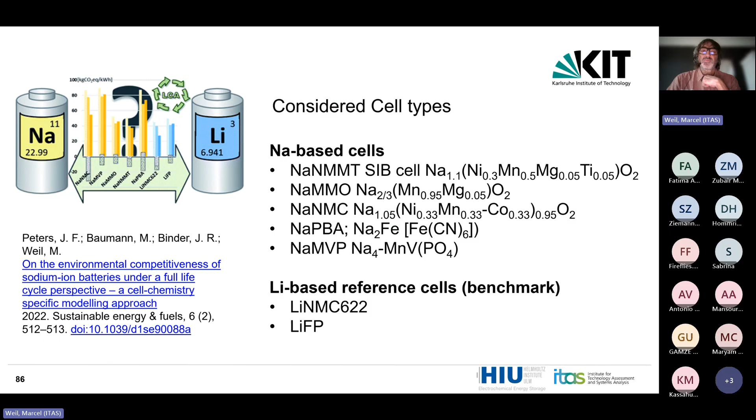So then we did another investigation where we also consider the comparison of sodium and lithium batteries, different sodium chemistries, and comparison with NMC and LFP batteries. Let's have a look at the results now, with a focus on recycling.

The first bar of each graph is only the production of the cell. The next bar shows the credit from mechanical recycling, where you get the macroscopic materials - the housing, current collector, and such things. Then, if I do sophisticated hydrometallurgical recycling, what credit do I receive if I recover, in an optimistic scenario, cobalt, nickel, lithium, manganese, and graphite.

For NMC, the first column, you see there is some credit for mechanical recycling, then a credit for the sophisticated hydro step, and then you get a net value which includes production and recycling. That already looks quite promising for NMC.

For LFP, it's a different picture. On one side I have a higher impact due to the lower energy density, so I need more battery for the same functional unit, the same purpose. Then if I do mechanical recycling, I receive a nice credit for the recovered macroscopic metals, current collector, housing, and so on.

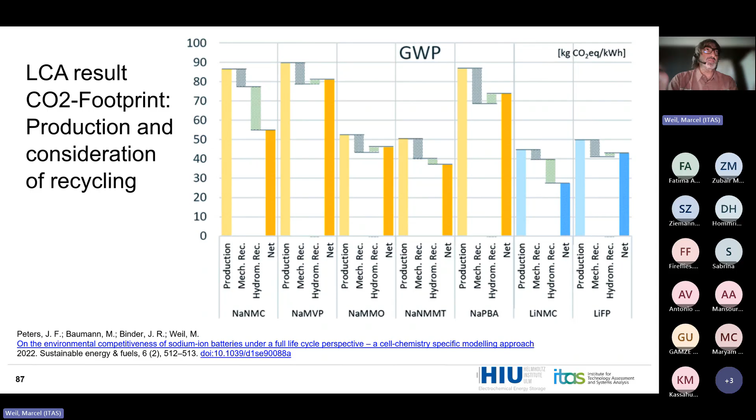And you see on one side, again very similar to the Volkswagen investigation, that the bars for production are higher in comparison to the lithium NMC system or lithium LFP system.

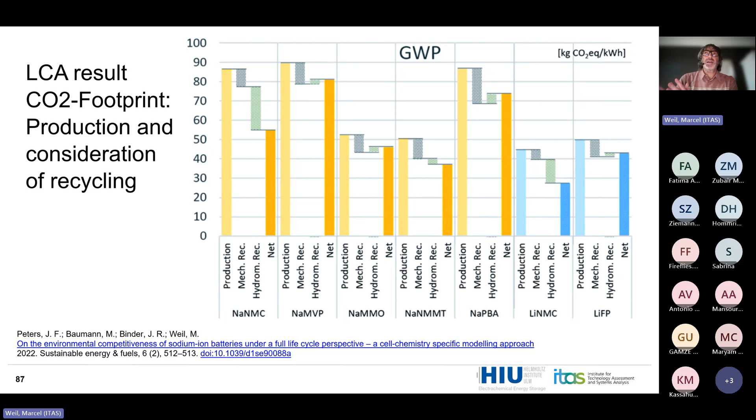That is one thing. The other thing is if you do recycling, sometimes you receive positive credit, but sometimes, especially in the second and third case, or also the fifth case, if you do a sophisticated hydrometallurgical recycling step very similar to NMC, you would have a negative impact because again you use a lot of energy and materials like chemicals to produce the materials for recycling. And the value of the materials you get for recycling is rather low.

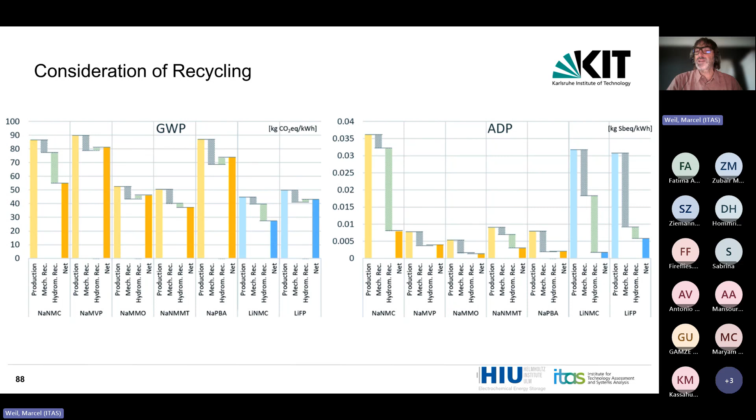Okay, so recycling is quite important. You see here now, beside the global warming potential, also the resource indicator ADP. Sodium performs much better than the lithium counterparts regarding resource use, but also here recycling is interesting to look at in detail, what are the effects for positive or negative credit.

So if you then think about the recycling of these systems, for NMC the recycler is quite happy, because if he recycles such a battery system, he has in the end a lot of value in his hands and can sell the different components. For LFP it's already challenging, but for the other systems they really have to think how they can recycle such a technology in an efficient manner so that, on one side, it should be cost efficient, but also that you have some positive impacts regarding environmental issues.

And therefore, if you think about the recycling, independently from the process, whether you go for pyro, hydro, or maybe some fancy direct recycling process, if you consider the low value of materials, you really have to think about design for recycling, and that is not only focused on the cell, as I talked about, but also on the module level and pack level.

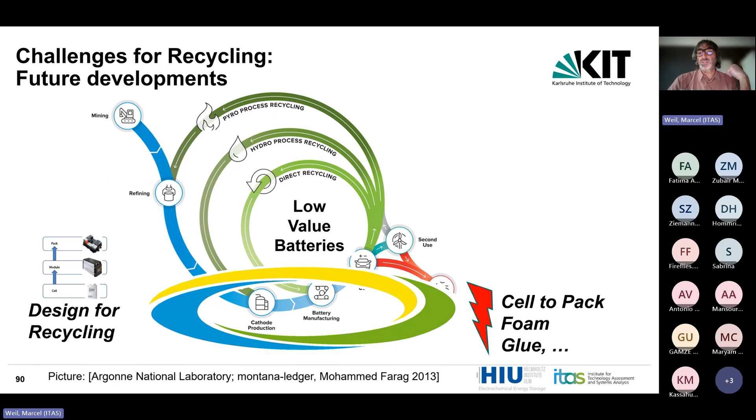So yeah, my message: please include also design for recycling methods and ideas. Then in the end, in 15, 20 years, there's also a good way to recycle the batteries, especially true for all batteries, but especially true for low value batteries like LFP, or even more so for sodium.

Yeah, that's from my side. I thank you for your attention. And now it's, of course, time for some questions. Thank you.